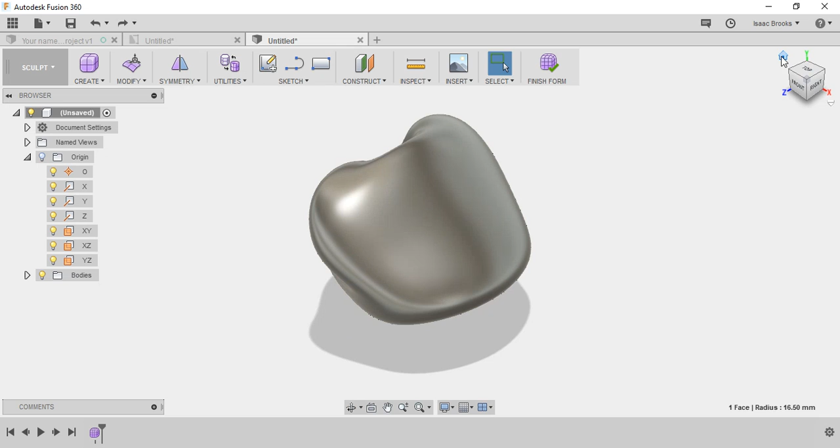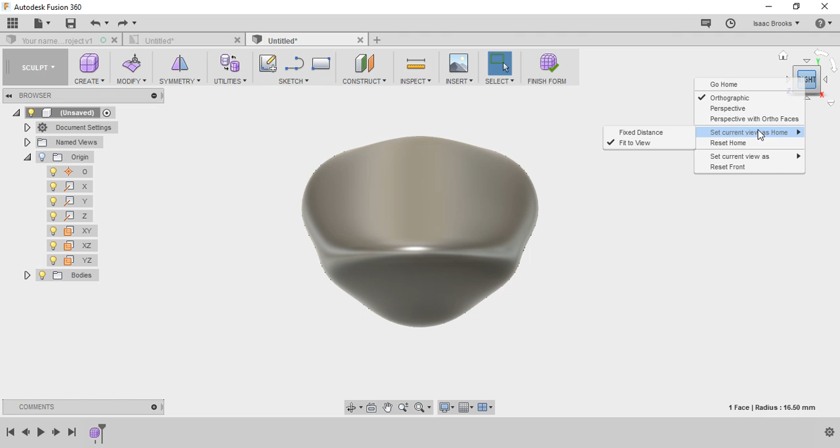So we've got our home key. To move around, we can move around with this. What I don't like on mine, though, is if I click on the right side, that is actually the front. To me, that would be the front and that would be the top. So I'm happy that the top's correct and the bottom's correct, but I think that being the front of my face should be the front. So what I can do is right click on this one and set current view as front. So now that's my front, that's my left, and that's my right side, and it looks correct how I think it should be. So that's how I can redo the orientation.

This is important for when we are going to go and put it into an orthographic drawing. Now, if you look up the back of the classroom, there's some yo-yos on the wall, and you can see there's orthographic projections up there. So this is really important to have this view right from here.

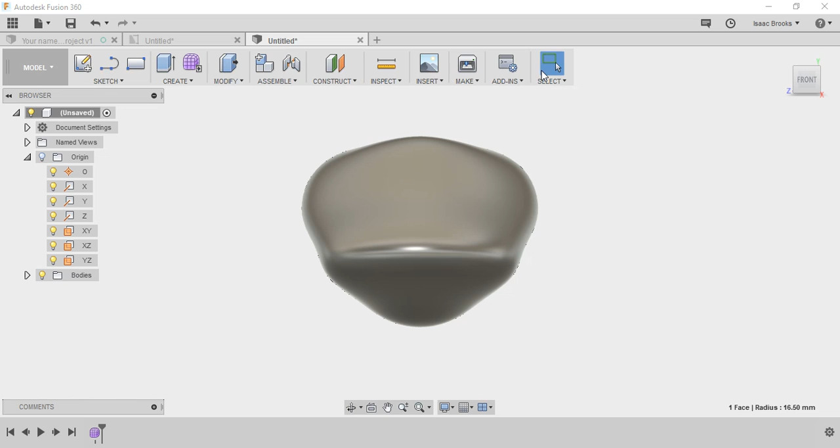Now, once we've finished making our freeform, so I've already made my freeform, I'm going to go finish freeform. So you can't do anything until that freeform is finished. It's like a sketch — once you've done your sketch, you have to finish it to be able to then edit it. So we did this before.

We worked out — I want to do some eyes in the front, so I need to work out what orientation this is. And sometimes it's a bit tricky to see, so actually if I go to home, it's probably easiest to see. So that would be left and right, that would be top and bottom, that would be front and back.

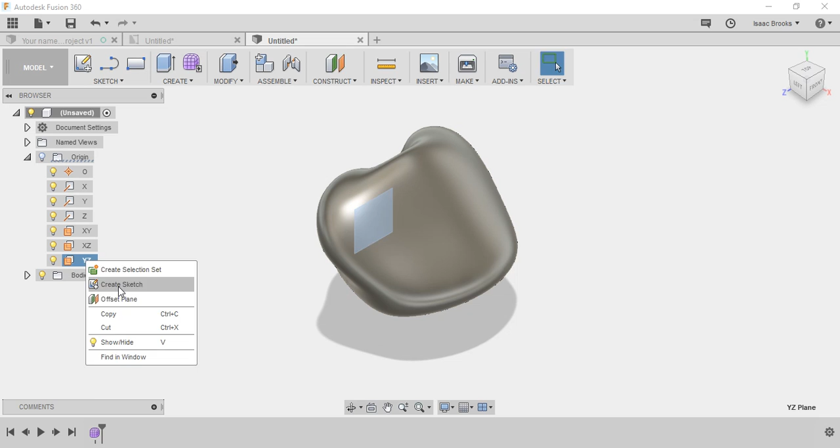So if I'm going to do some eyes in the front, I want my YZ plane in this case. So I'm going to do an offset plane on that, and I want to push it all the way out to the front of his nose. It doesn't matter if it's off the front, because I'm just going to extrude that part in further. So for ease, I'm just going to put it out here, press enter, and then I can do a new sketch on this part here.

And I want to do two eyes, but I'll just use a line tool. So single click, and single click and hold to make a curve. Single click, and single click, and single click here and curve — make sure that this is all joining up. If you have open lines using the line tool, you can't select that surface. And I know that they're all joined because it goes yellow in there. Ideally, I'd then go draw another one on the same size. There is a way to reflect that, but I'm not going to go through that now.

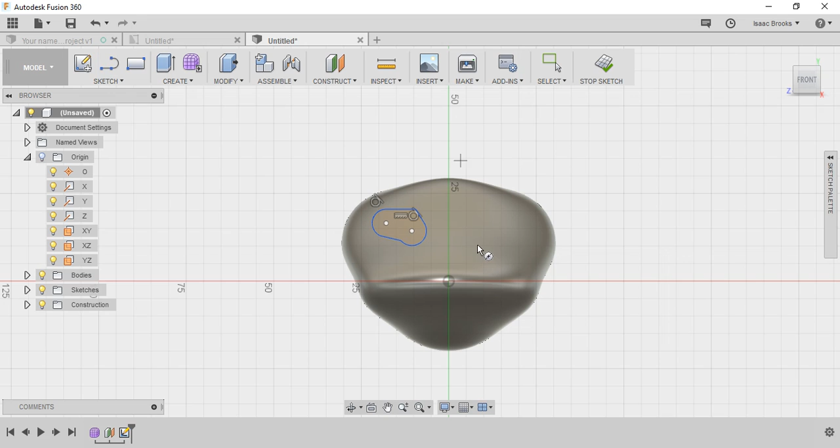If we were to do two eyes, in my case, I'm just going to do a circle. You can use the shortcut keys — if I press L on the keyboard, the line tool will come up, and if I press C on the keyboard, the circle will come up. So I'm just going to do odd shape eyes, stop sketch, and now I can extrude these back into the head.

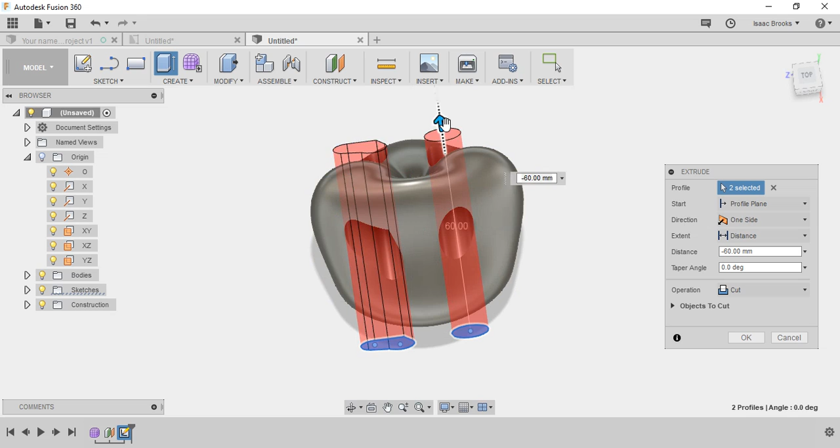So I want to cut. If it automatically goes backwards, it will go into cut mode because it's cutting back into the object. So obviously that would cut through his face, so I've probably gone a bit too far there — I probably only want to cut that far into it. Now another thing I can do is, if I want his eyes to be sticking out, instead of going cut, I can go join.

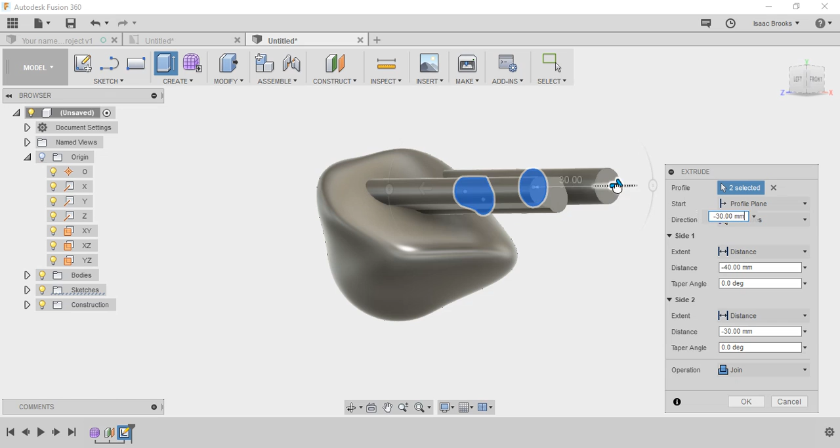So I could go join, and that's going to add it onto the existing part there. The other one I can do is two-sided, so I can even pull it out from there as well, or do a two-sided cut as well.

Can you copy and paste like your first sketch thing that you did? Is there a way to get the same eye that you did on the left and the right as well? There is. I'm going to show you individually how to do that, because I don't want to get caught up on that right now.

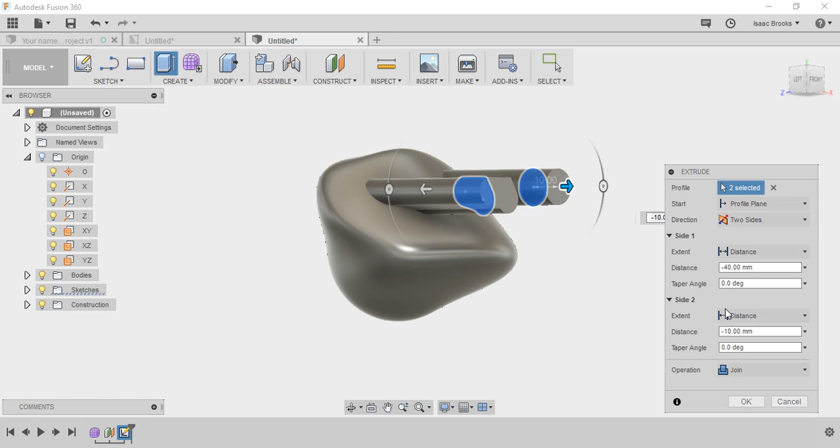So I'm just going to go one-sided, and I'm going to go join, have really big popping out bulging eyes, and I'm happy with that.

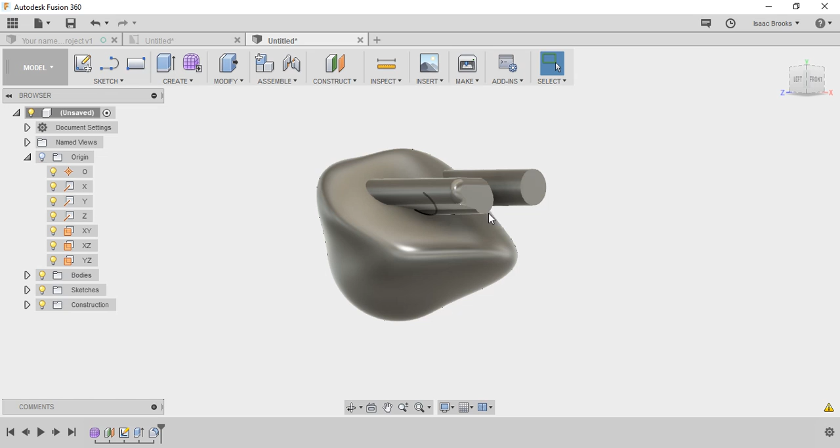Then I go to the modify tool, and I can use my chamfers, and I would select more than one surface. Ideally I'd go all around the outside and do a nice little chamfer to make it really pretty. Okay, so now I've started to do that.

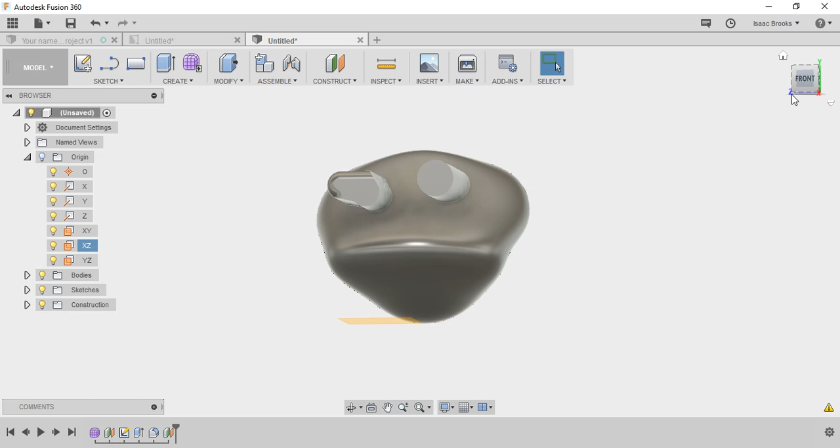I'm also going to do a neck, so on my bottom I need to select the surface, offset plane, and I want to offset it to the bottom of my neck. Press enter, and then I'm going to create a new sketch on that offset, and I want to use the circle tool to make a hole in the neck. This is where we need to work out the diameter of the neck.

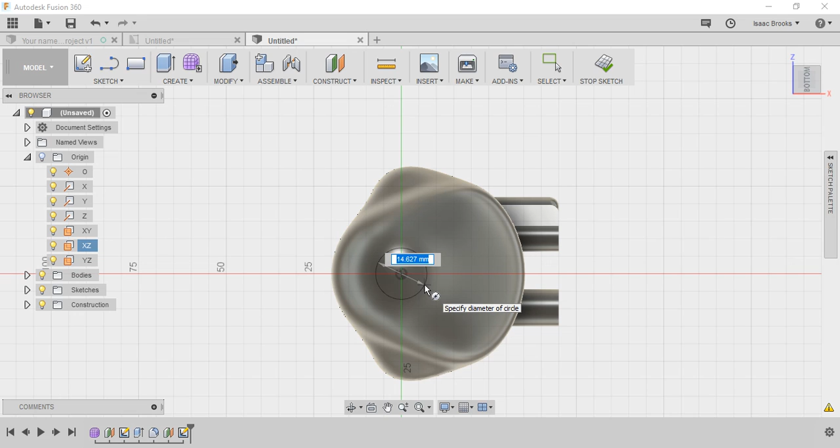So if you want your neck 10 millimeters, I need the hole to be 10.5 millimeters. So I'm going to put mine in as 10.5. You can change those measurements to be bigger diameter or smaller diameter, that's fine.

And then I can go select that shape and cut that in. Ideally, the neck width should be about 10 mil minimum into the actual body, the negative part of it. So I've got that 10 mil in.

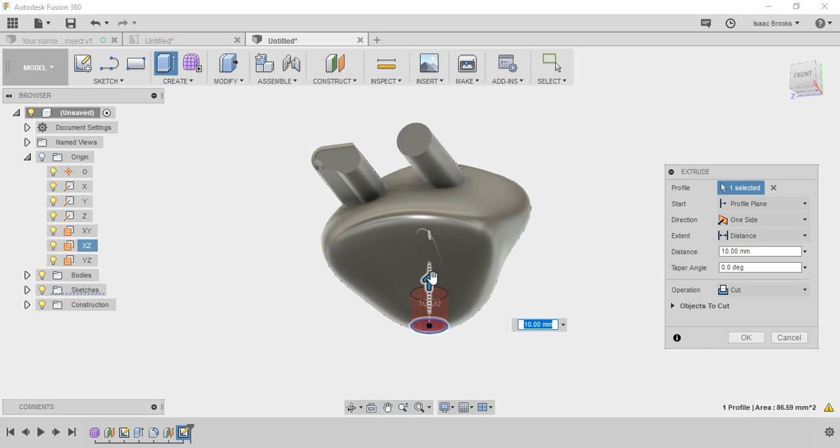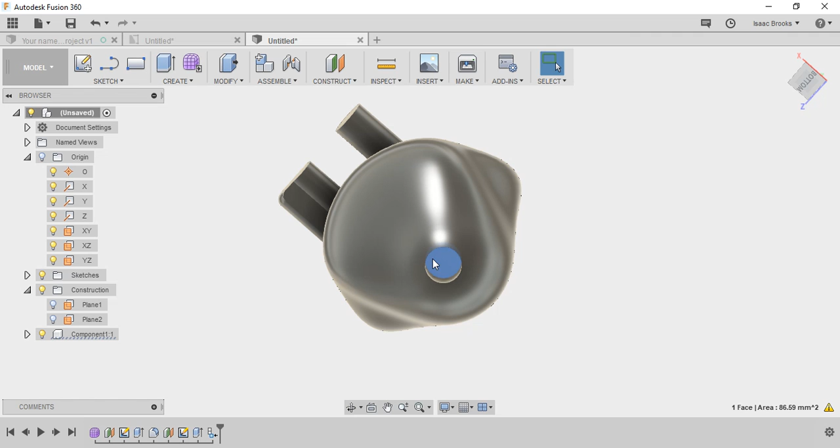Now what I'm going to do is create a new part. So I can create a new part on this here, off this plane here. So the top of the neck, where the hole goes, I'm going to put in a new body, a new component. I'll select this part here and go new sketch.

And I'll go the circle tool. This time it will only be 10 millimeters because I want it smaller so it will fit inside. And then I can extrude that out. But when I go to extrude that out, I want to create this as a new component because we want it to be able to print as a separate part. If I was to do join, it would actually fuse onto the existing part.

So I'm going to scroll down to new component. This is a really important part for your second part because we have to do two parts. So the top part, my head, I'm pretty happy with. I've done that. Now I'm going to actually create the second part.

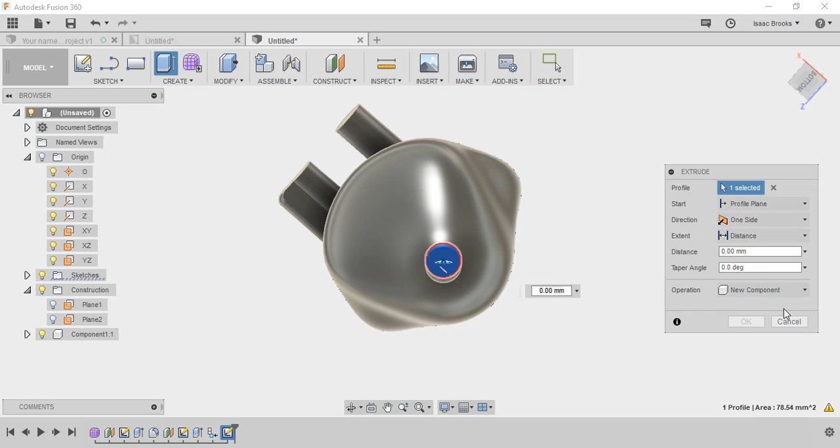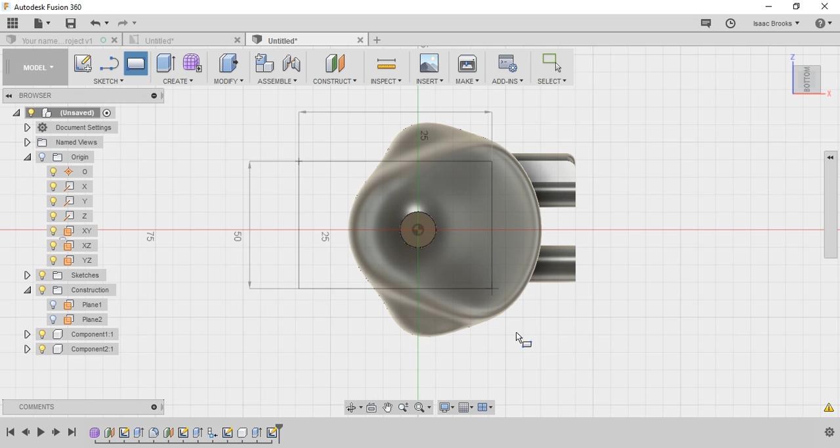So I'm going to extrude that out until I think it's good, all the way to there. I'm happy with the neck about that long. Enter. And now I can start actually drawing my body on this part here. So I'm just going to do a body like this. And stop sketch, extrude that out.

Oh, spin it around again. Okay, and now I've actually got two components. So I've got the head component, which I can turn off, and I've got my body component.

So, girls, listen up, please.

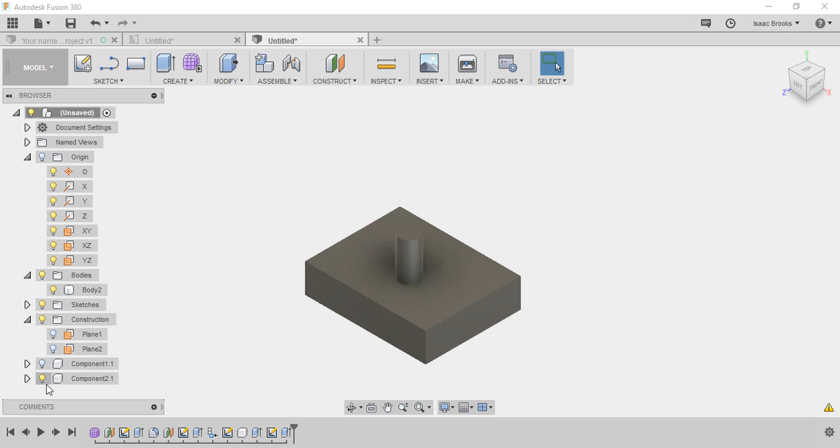I can also turn that component off as well, all right? So it's really important that you're creating multiple components for each of your parts, all right? So I'm going to pause or stop that.